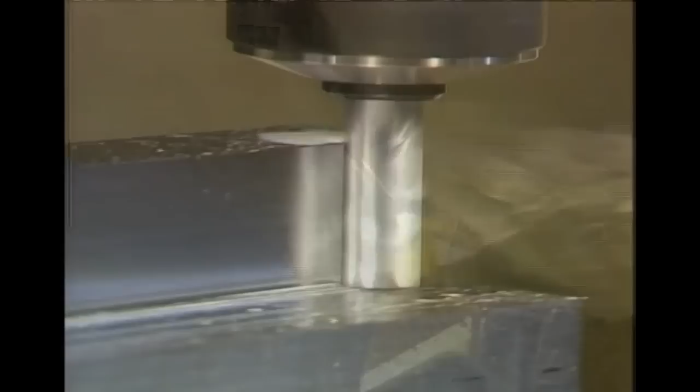Fundamental Manufacturing Processes video series, examining the tools and techniques of precision metalworking. This program is an introduction to cutting tools and tool materials. Tooling incorporates thousands of different cutting tools and tool holders for discrete parts manufacturing.

Principal categories within cutting tools include single-point cutting tools, such as lathe tools, multi-point cutting tools, such as milling cutters, drills, reamers, and taps. Cutting tools are either standard tools, which are purchased as catalog items, or special tools, which are designed and built for a special machining job, often to suit a particular workpiece.

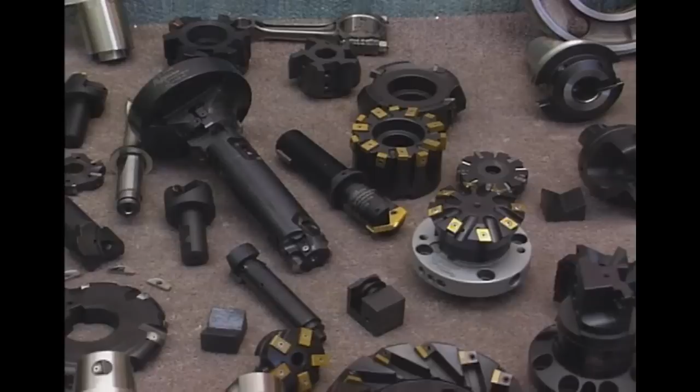The main objective in the selection and application of cutting tools is to safely machine a workpiece in the shortest possible time while meeting the part's quality requirements. Furthermore, the specified tooling should be the least costly and least complex tooling available to satisfactorily fulfill the qualitative and quantitative workpiece demands. It is estimated that nearly 50% of all cutting tools are used incorrectly.

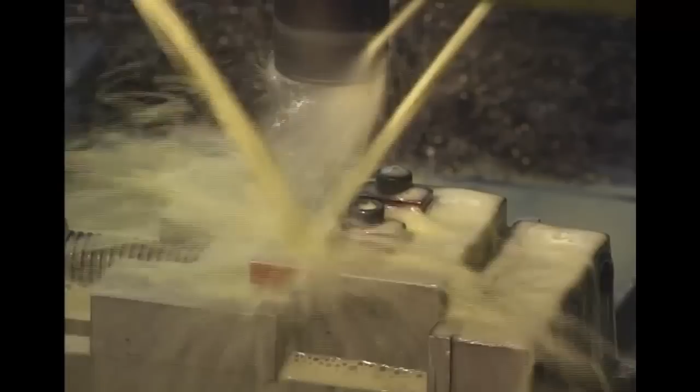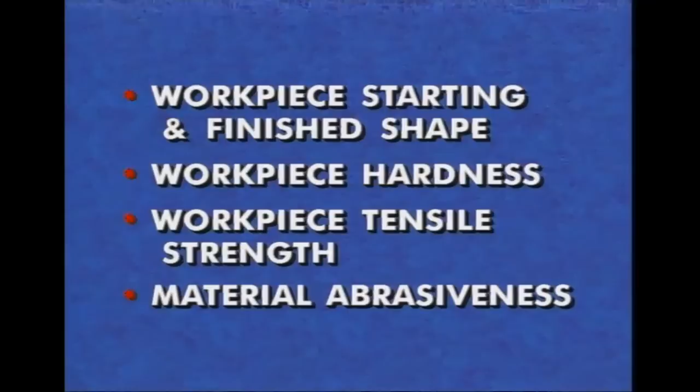Additionally, the number one error when formulating tooling selections is calculating monetary savings based on lowest cost per tool rather than on maximized productivity and extended tool life. To effectively select tools for machining a part, a machinist must have specific information about the workpiece, such as the starting and finished shape, the hardness, the tensile strength, and abrasiveness of the material. These factors all influence the interaction between the tool and the work.

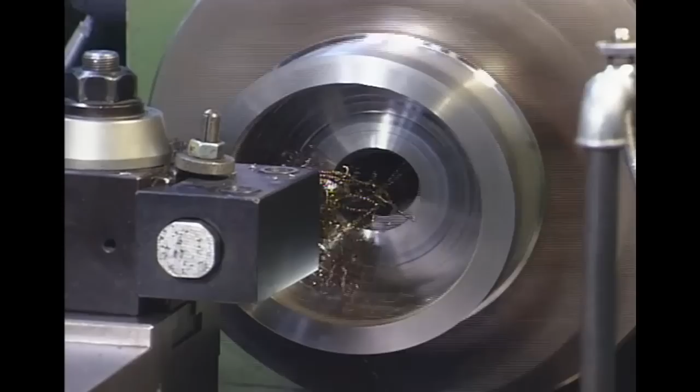The machinist also needs to know whether the workpiece material breaks into short chips easily or whether it tends to flow into long, hard-to-break stringy chips. Also important is the part's work-holding setup, which properly orientates and holds the workpiece, and the power and speed capacity of the machine tool. Changes in the workpiece material, part tolerances, geometries, and quantities required often demand corresponding changes in the tool materials and/or tool geometries selected.

For the wide variety of machining applications, there is a corresponding necessity for different cutting tool materials. The ideal cutting tool material should be harder than the workpiece it is cutting, be able to retain its hardness and stability at high temperatures, resist wear and thermal shock, be impact resistant to withstand the mechanical shocks of milling, and also be chemically inert to the work material and the cutting fluid. No single cutting tool material incorporates all these qualities. Instead, trade-offs occur among the various tool materials.

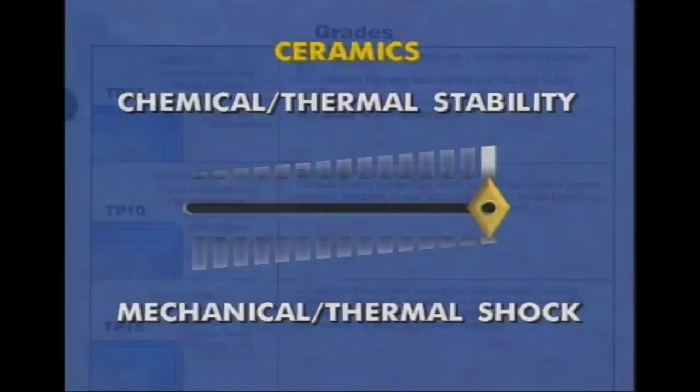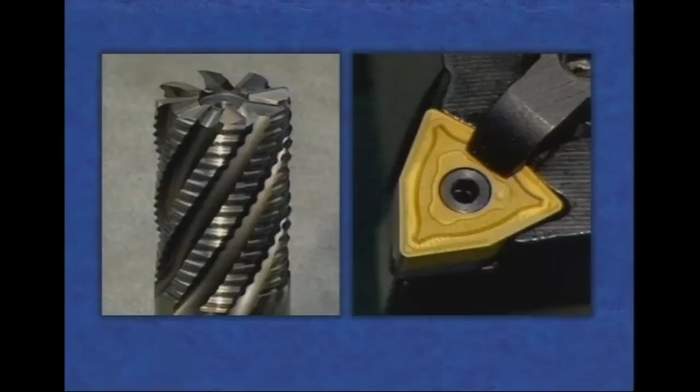For example, materials with excellent chemical and thermal stability, such as ceramics, tend to be brittle, with limited resistance to mechanical and thermal shock. These variable properties take place both within a material class, such as different grades of carbide, as well as when comparing different classes of tool materials, such as high-speed steel and carbide, or carbide and ceramics. Every new and established tool material has an application area in which it outperforms the other cutting tool materials. Newer materials tend to minimize but not eliminate the application of older materials, such as high-speed steel.

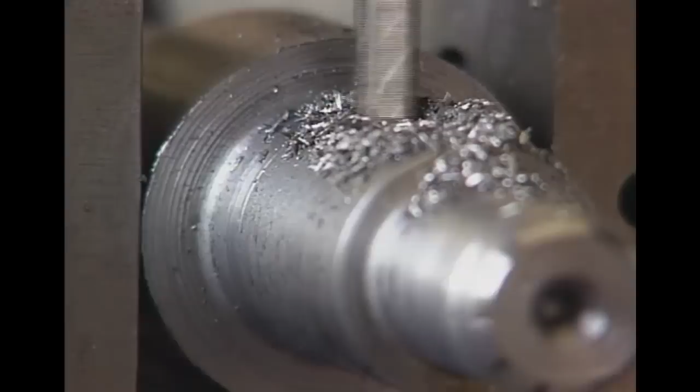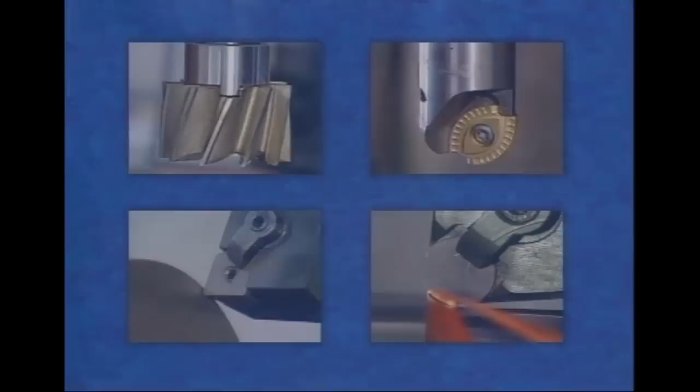The development of cutting tool materials has offered steady advancement in the rate of metal removal and consequently in the need for more heat-resistant materials. So there has been a progression from high-speed steel to carbide to ceramics and onto other super-hard cutting tool materials. High-speed steel tools were introduced around 1900 and gradually replaced the carbon steel tools of the 19th century. High-speed steel cuts about 4 times faster than the carbon steel tools they replaced, hence the name high-speed steel. It operates at temperatures up to 600 degrees centigrade.

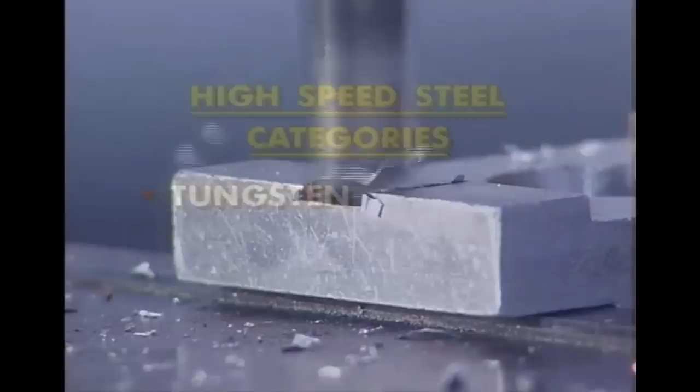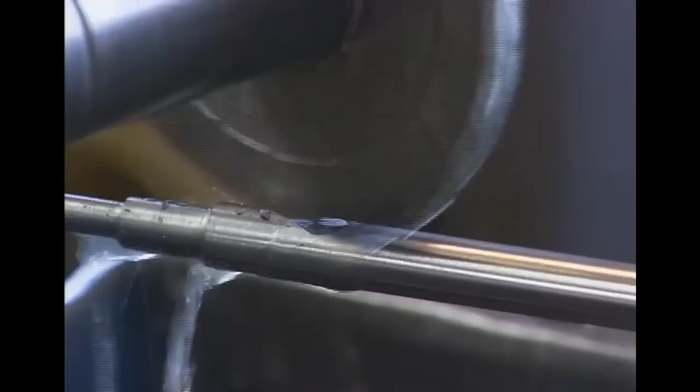There are over 30 grades of high-speed steel in 3 main categories: tungsten-based, molybdenum-based, and molybdenum cobalt-based. Since the 1960s, a form of high-speed steel called powder metallurgy high-speed steel has allowed tools such as drills, milling cutters, and form tools to be made to near-net shapes that offer superior grindability. The use of coatings, particularly titanium nitride, allows high-speed steel tools to cut faster and last longer. Titanium nitride provides a high surface hardness, is resistant to corrosion, and minimizes friction.

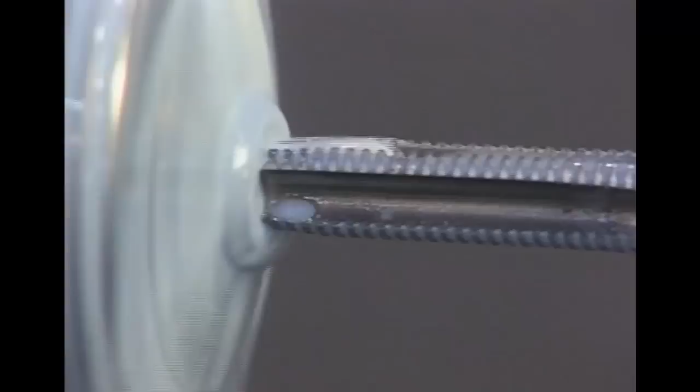In industry today, high-speed steel tools have been replaced by carbide tooling in many areas, but high-speed steel tools are still preferred for some tool room and low cutting speed operations, and for certain tool types such as small diameter drills, taps, and end mills. Carbide tools were introduced from Germany in the 1930s and today are the most widely used cutting tool materials. Carbide and coated carbide tools in general cut about 3 to 5 times faster than high-speed steel and operate at temperatures up to about 1200 degrees centigrade.

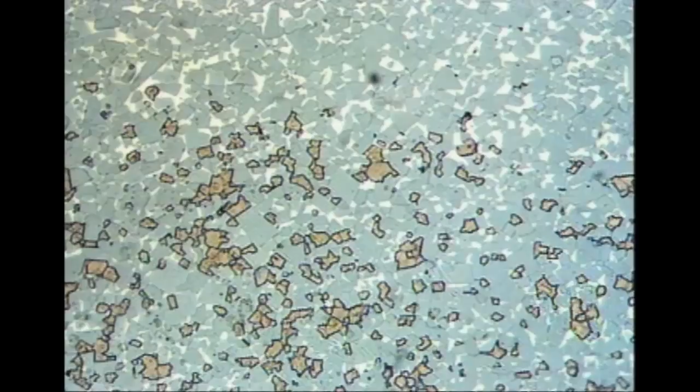Cemented carbide is a powder metal product made up of finely ground hard carbide particles cemented together by a binder. The major categories of hard carbides are tungsten carbide, titanium carbide, tantalum carbide, and niobium carbide. The hard carbide particles are from 1 to 10 microns in size and make up from 60 to 95% of the material. The binder is mostly cobalt.

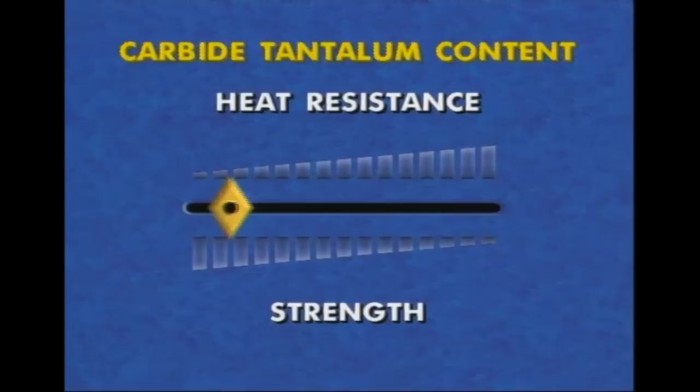Variations in particle size, binder, metallurgy, and manufacturing techniques cause the properties of the carbide tools to vary widely, particularly in the balance of hardness and toughness. For example, a higher tungsten content increases the wear resistance of a carbide insert, but reduces strength. A higher percentage of cobalt binder increases strength, but lowers the wear resistance. Additions of an alloying agent, such as tantalum, can increase a carbide grade's resistance to heat, but reduces its strength.

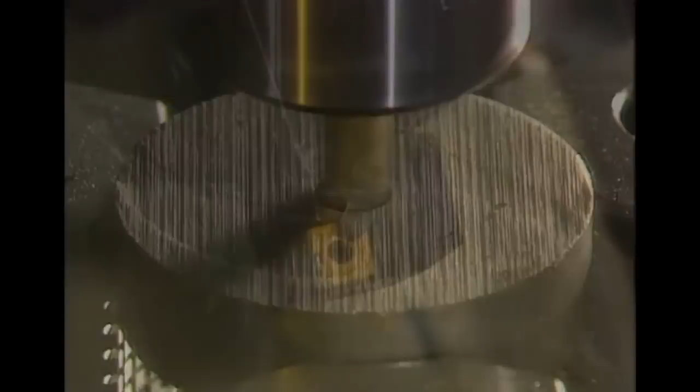Carbide is utilized for solid round tools, such as end mills and drills, or in the form of inserts clamped to a shank or holder. Inserts may be indexed to another position when an edge has worn. When all the tool edges on an insert are dull, the insert is generally thrown away or recycled. Some inserts are single-sided, others double-sided.

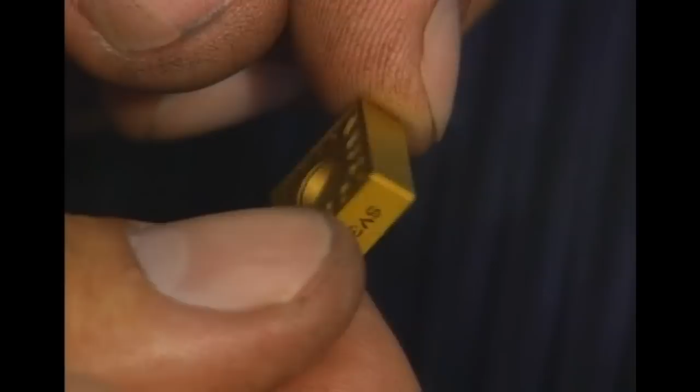Every manufacturer of carbide tools has a variety of carbide grades for specific work materials and types of machining applications. Choosing the correct grade of carbide can double tool life or double the cutting speed for the same tool life. Tough, shock-resistant grades are needed for interrupted cutting. Harder and chemically stable grades are needed for finishing steel at high speed. Heat-resisting grades are needed for machining the superalloys, such as Inconel and Hastelloy.

There are many considerations when selecting a carbide grade for metal cutting, such as the type of workpiece material, especially its hardness, and the condition of the workpiece's outer skin. If it is a forged or cast workpiece, a tougher insert should be selected. Is the cut heavy, or is the cut light? Is the machine tool and work holding setup rigid or loose? If loose, then a stronger, more durable carbide grade should be selected.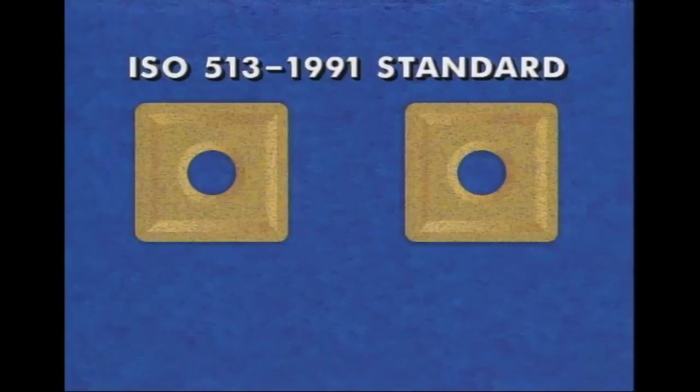Because there are not effective U.S. or international standards for carbide grade specifications, it is the carbide suppliers who recommend which grades they believe are suitable for given applications. Two carbide grades from different suppliers with identical coding in the International ISO 513-1991 standard will likely have different compositions, microstructures, coatings, properties, and most importantly, performance.

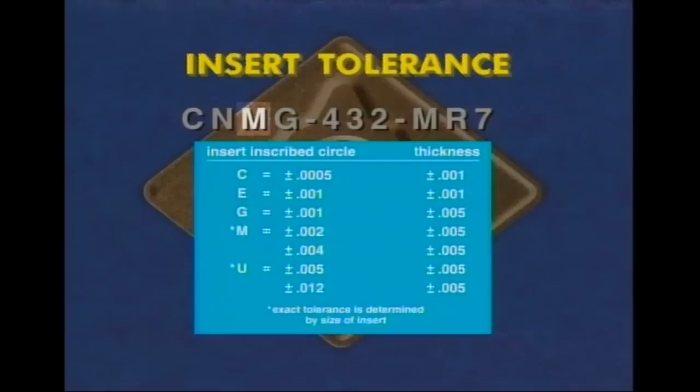Although carbide inserts are not standardized by application, they do carry their own 7-character ANSI code, which is used for their identification. The first character represents the insert's shape. The second character represents the insert's relief angle, which may be from 0 to 30 degrees. The third character represents the insert's tolerance class. Molded inserts usually have a code M tolerance and are the most common. The fourth character represents the type of insert with regards to its required clamping system.

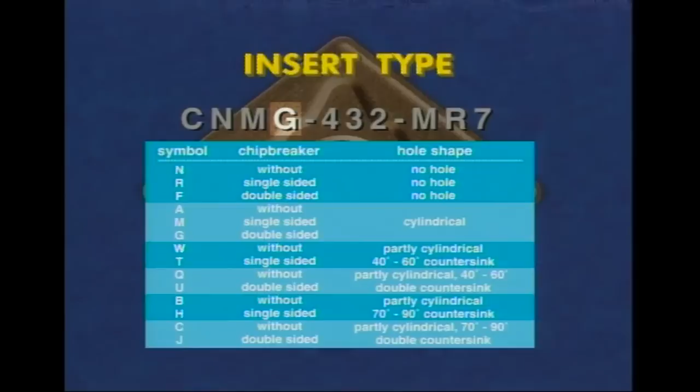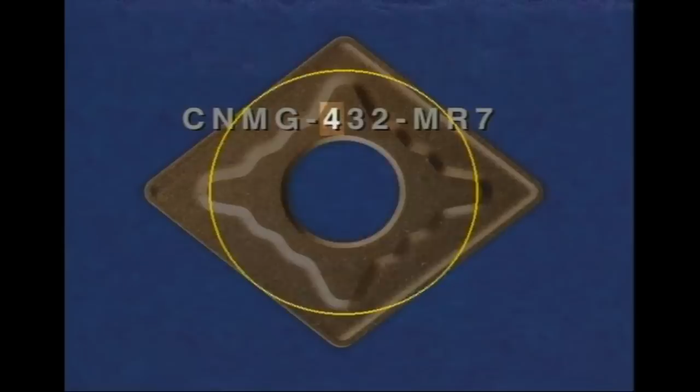The fifth character designates insert size by the largest circle which can be inscribed within the perimeter of the insert, known as the inscribed circle or IC size. The sixth character represents the insert thickness. Harder materials and higher feed rates require thicker inserts to withstand the cutting forces. The seventh character represents the corner radius on turning inserts. On milling inserts, this character represents the wiper edge angle.

This ANSI classification system does not categorize everything. For example, the varieties of chip breaker geometries in carbide turning inserts are not required to be covered, but many manufacturers do add a chip breaker code.

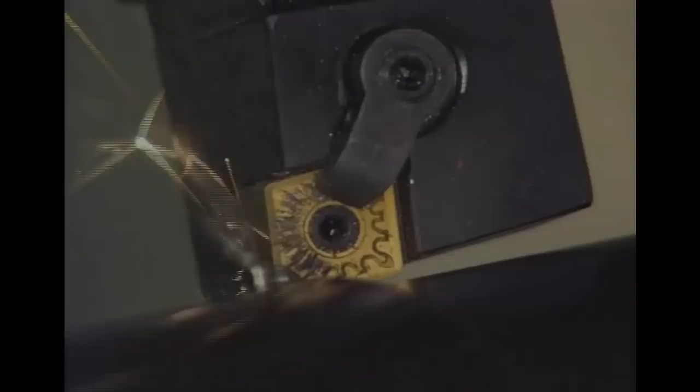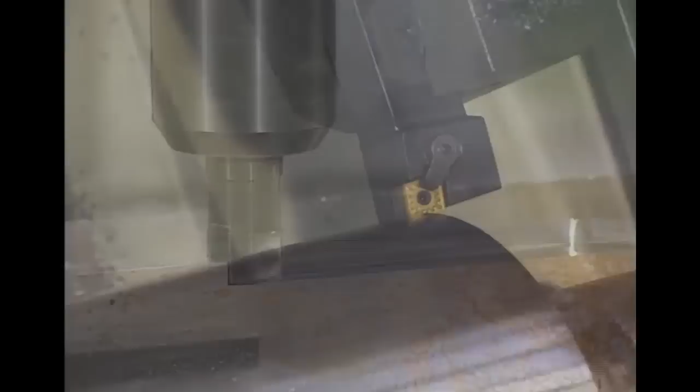2/3 of all carbide tools used are coated, and a coated carbide should be the first tool material considered for most operations. In general, a coated carbide tool may have over 3 times the tool life of an uncoated grade, or may operate at cutting speeds 2 to 4 times higher for the same tool life. These coatings help overcome carbide's primary limitation, that is, as fracture resistance or toughness increases, wear resistance or hardness decreases.

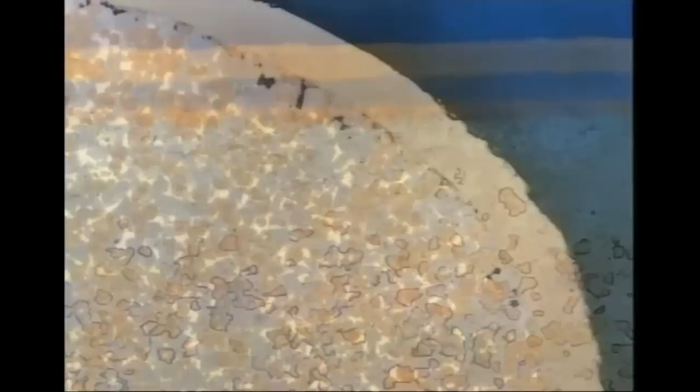These wear-resistant coatings provide carbide grades with broad application ranges, offering a combination of characteristics not obtainable with carbide alone. Most coatings are under 1/1000th of an inch thick and have several layers. Each layer has a particular benefit, such as resisting heat or decreasing friction. The main insert and cutting tool coating materials are titanium carbide, titanium nitride, aluminum oxide, and titanium carbonitride.

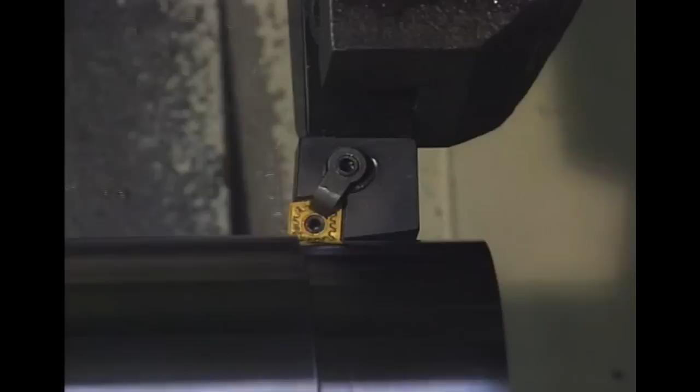Aluminum oxide and titanium carbide are very hard and chemically inert, and titanium nitride minimizes friction. For an appropriate coating, the coating material must adhere or bond strongly to the carbide tool surface. The two major coating methods are chemical vapor deposition and physical vapor deposition.

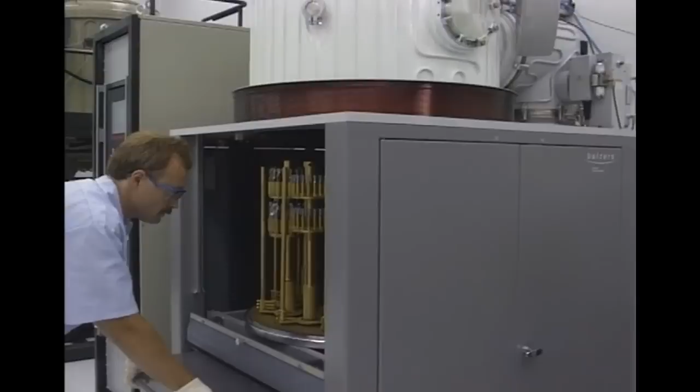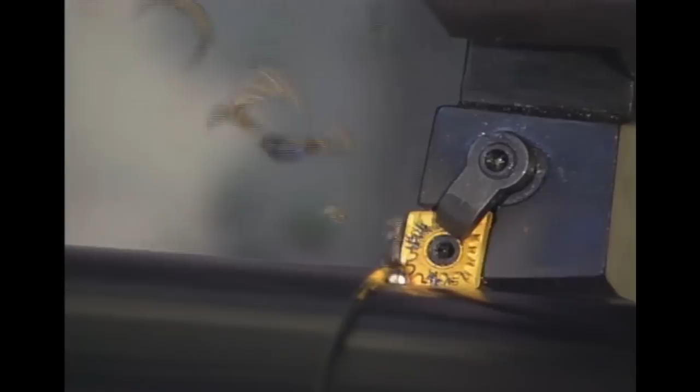The chemical vapor deposition process takes place at about 1000 degrees centigrade and is typically required for the multi-layer coatings. The physical vapor deposition method takes place at temperatures around 500 degrees centigrade and is used for single-layer or dual-layer coatings. Coated carbides are more costly on a per-insert basis than uncoated inserts, but they achieve greater productivity. In terms of parts per edge, the coated carbides have the advantage.

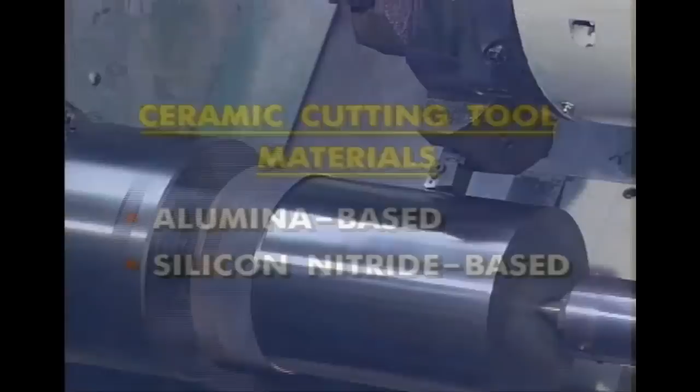Ceramic tools are harder and more heat-resistant than carbide tools, but also more brittle. They have been successful in machining cast iron, hard materials, and superalloys. Best results are at high speeds, which mean high cutting temperatures. Ceramic cutting tools can be divided into alumina-based ceramics and silicon nitride-based ceramics.

Alumina-based ceramics are used for high-speed semi-finishing and finishing of ferrous and some non-ferrous materials. These tools are not good with aluminum because of an affinity between the materials. Alumina-based ceramics offer mechanical and chemical wear resistance, but lack toughness and thermal shock resistance. Thus, they are generally not used for milling, rough turning, or for interrupted cuts.

Silicon nitride-based ceramics, also called sialons, offer greater toughness and thermal shock resistance than alumina-based ceramics. They are used in high-speed roughing applications and have excellent abrasion resistance. Silicon nitride-based ceramics are used for high-speed machining of gray cast iron, as well as on superalloys such as nickel and cobalt-based work materials.

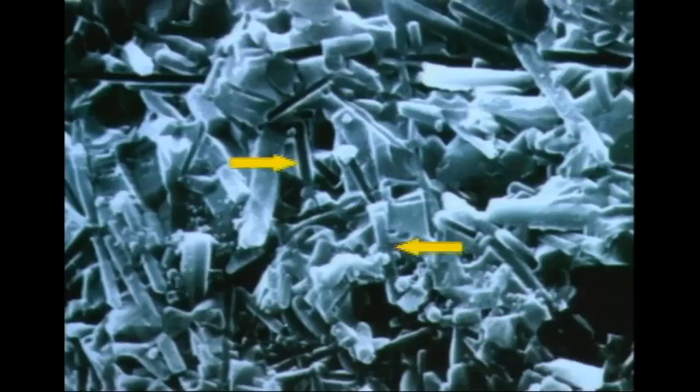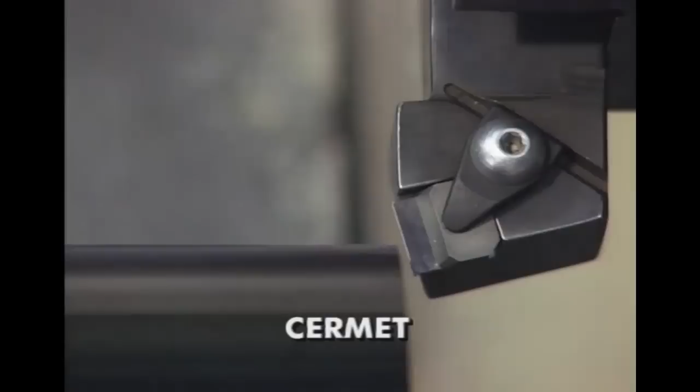Whisker-reinforced ceramics with silicon carbide reinforcing whiskers in an aluminum oxide matrix are stronger than the brittle ceramic matrix alone. The whiskers act like rebar in concrete, adding mechanical strength and thermal conductivity. Cermet tools are composed of materials commonly applied as coatings to carbide tools, titanium carbide and titanium nitride. The solid Cermet insert offers excellent resistance to various causes of wear in machining, especially chemical resistance.

Initially used only for semi-finish and finish turning and boring, some Cermet grades are now tough enough to handle rough turning as well as milling applications on carbon steels, stainless steels, and some ductile irons.

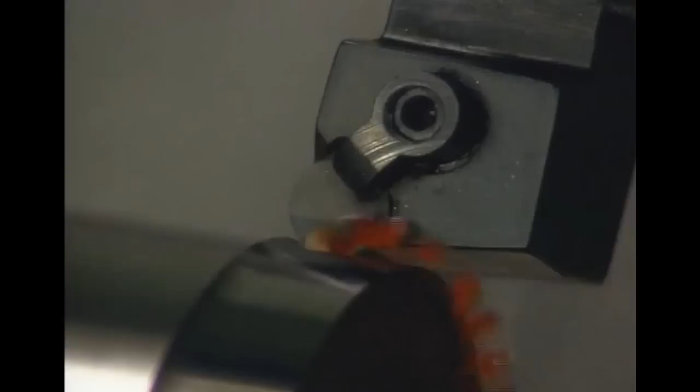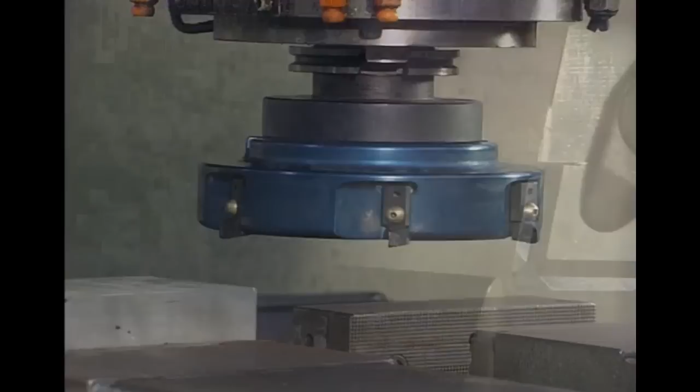Super hard tool materials are divided into two categories: cubic boron nitride and polycrystalline diamond. Typically, a small tip of one of these super hard materials is bonded to a carbide insert base. Super hard inserts may cost 30 times more than a carbide insert, so their use is limited to well-chosen, cost-effective applications.

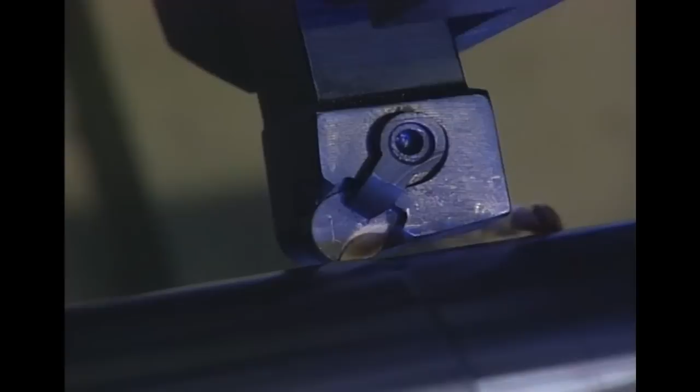Cubic boron nitride, or CBN, the second hardest material after diamond, is used to provide long tool life in machining very hard, tough ferrous materials, hardened die steels, alloy steels, and hard-facing materials. CBN is a hard, brittle material requiring cutting-edge preparations to suit application needs. Other techniques are utilized to protect the cutting edge, such as the use of a lead angle where possible, and a strong shape, such as round or square, is recommended.

Polycrystalline diamond, or PCD, is composed of micro-sized diamond particles in a metallic binder and is over 50 times harder than common carbide. PCD is used for non-ferrous applications and also cuts abrasive materials such as glass, reinforced plastics, and hardwoods for furniture manufacturing. In some high-volume applications, PCD inserts have machined parts for 6 months before having to be replaced, outlasting carbide by up to 100 times.

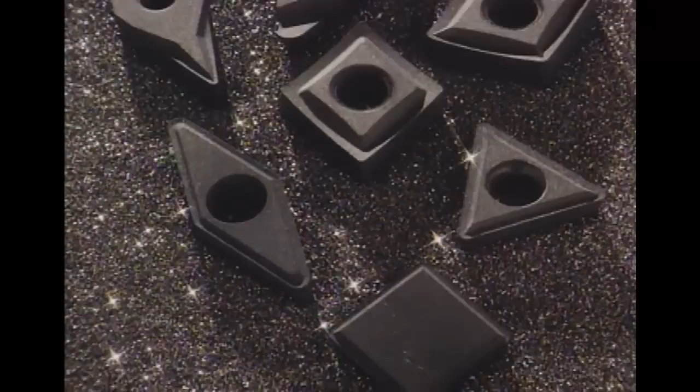Diamond-coated carbide and ceramic inserts are a recent addition to cutting tool materials. They offer a greater variation in geometries than do PCD inserts, but like PCD, can only be used for machining non-ferrous materials.

All cutting tools have a working life, and then they dull, fail, or fracture. For this reason, they are called perishable tools. The cutting tool life cycle may be a single use or involve indexing to multiple edges, as with an insert, or multiple resharpening, such as with drills, end mills, and taps. It is a safety hazard to run any cutting tool until it breaks. This creates scrap, impacts tool and part costs, and reduces productivity.

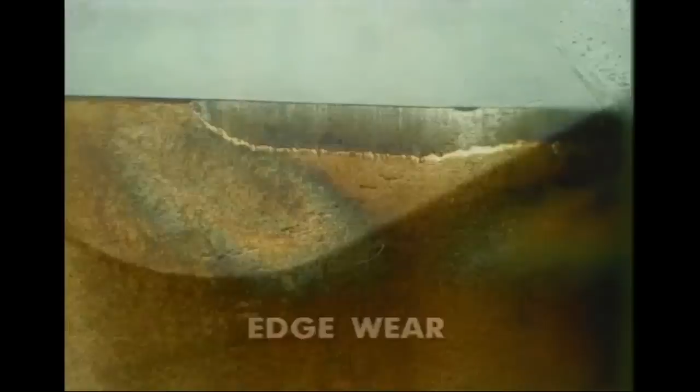Aside from breakage, cutting tools wear in many different ways. Edge wear and flank wear are both a normal and slow type of tool wear. In carbide turning of steel, it often occurs after 15 to 30 minutes of cutting. If the work material is highly abrasive, such as with certain cast irons, this type of wear will accelerate. To correct this problem, select another more abrasion-resistant tool grade.

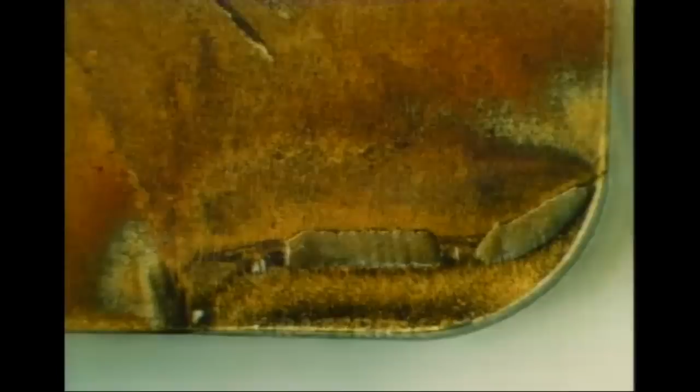Cratering, or top wear, behind the cutting edge occurs commonly in machining long chipping steels, from abrasion and diffusion wear. If the crater grows large enough and contacts the cutting edge, the tool fails immediately. To combat cratering, use hard grades of carbide with tantalum carbide or titanium carbide and hard coatings such as aluminum oxide or other materials such as cermets or ceramics.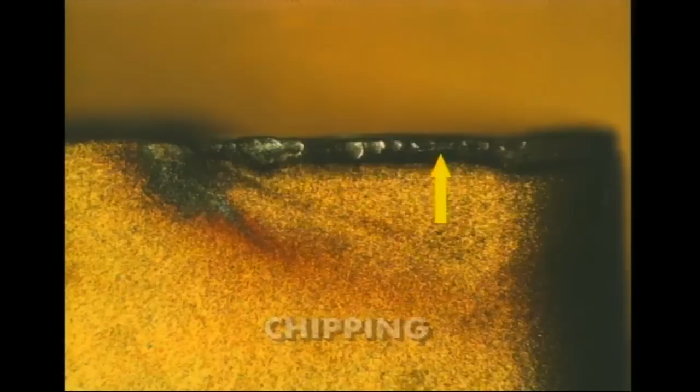Chipping on a tool edge is an unpredictable form of tool failure. It is sometimes started when a high point on an edge breaks away. A stronger carbide grade, different edge preparation, or lead angle change may eliminate chipping.

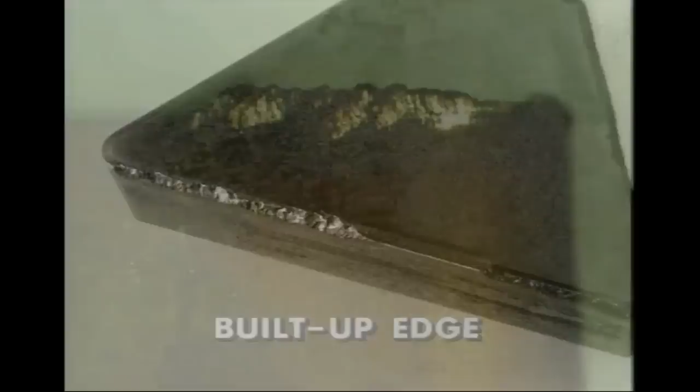A built-up edge is a deposit of workpiece material adhering to the rake face of the insert. Chips weld themselves to a cutting edge. Sometime later, the deposit breaks off and pulls small pieces of carbide out of the edge. This occurs at or just behind the edge. Ductile materials such as low-carbon steel, soft aluminum, and copper cause this damage. Higher rake angles, faster cutting speed, and higher pressure cutting fluid all help eliminate built-up edge.

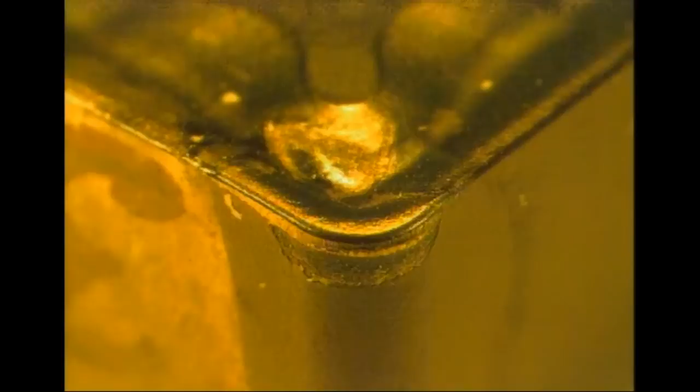Deformation takes place at very high temperatures, 1800 to 2000 degrees Fahrenheit. These temperatures cause the insert binder material to soften, depressing the top surface and mushrooming the sides out into the clearance angle, where it is abraded away. Deformation is difficult to detect without the use of a microscope. A deformation-resistant grade and/or high hot hardness coating is required, or else reduce the operation speed to reduce the heat.

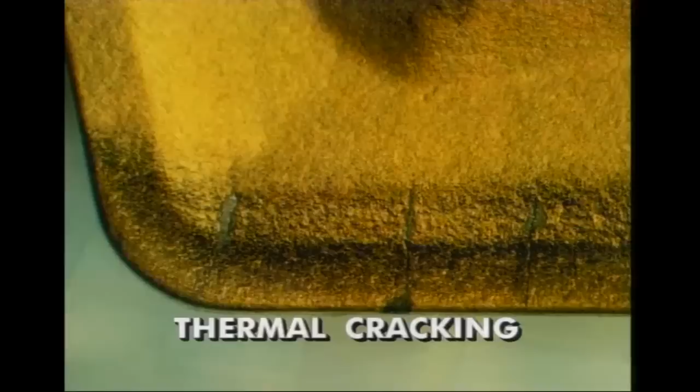Thermal cracking occurs when inserts go through a rapid heat-cool cycle, such as in either interrupted cutting or when the coolant is improperly applied, suddenly cooling a hot insert.

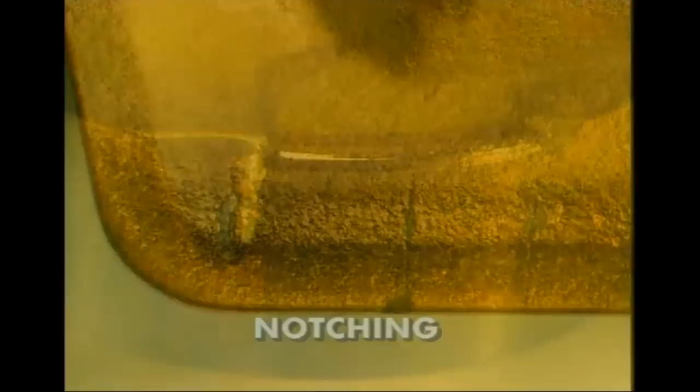A notch at the depth of cut line may occur in machining high-temperature alloys or with any very hard outer layer, such as in a casting or forging. This is caused by the pullout of small particles of tool material at the flank, face, and cutting edge by the pressure welding of work material to the tool material. An edge preparation on the insert and an increased lead angle may decrease notching.

These are only some of the natural causes of tool wear. Maximum tool life can be achieved through selecting the proper insert or tool material or altering the cutting conditions. Let's re-examine the material contained in this videotape. The main objective in the selection and application of cutting tools is to safely machine a workpiece in the shortest possible time while meeting the part's quality requirements.

There is no ideal cutting tool material, but the rapid evolution of tool materials has given us a wide choice to meet any need. High-speed steel tools are commonly used in tool rooms and in low-speed operations. Round tools such as drills, taps, and end mills are commonly made of high-speed steel. Coatings have extended the applications and cutting life of high-speed steel tools.

Carbide tools, particularly coated carbides, are today's most common cutting tool material. There are a great variety of carbide compositions and coating types. Carbide tools may be indexable inserts or solid round tools such as small diameter end mills or drills. Coated carbide inserts are the first tool material to consider for most production operations. Most insert coatings have multiple layers to protect the tool against abrasion and chemical wear.

Ceramic inserts may be alumina-based or silicon nitride-based. They withstand higher heat than carbide, have good resistance to abrasion, and they cut very fast. But ceramic inserts are less shock resistant than carbide tools, so their applications are limited. Cermets are composed of titanium carbide or titanium nitride with excellent resistance to various forms of wear. But cermets do not withstand high heat well.

The super hard materials are cubic boron nitride, CBN, for ferrous applications, and polycrystalline diamond, or PCD, for non-ferrous applications. Both materials are expensive, but can outlast carbides by 10 to 100 times.

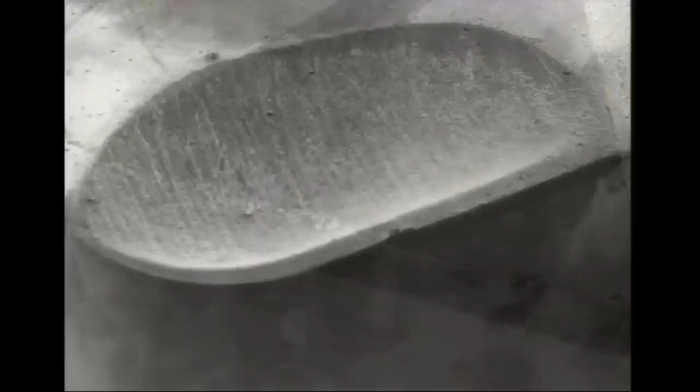All cutting tools have a finite performance life. Then they wear out or fail. Hence, they are called perishable tools. The varieties of cutting tool wear include edge wear, flank wear, cratering or top wear, chipping of the tool edge, deformation, and the edge damage caused by the pulling away of material on a built-up edge. Two other types of tool wear are thermal cracking and notching.